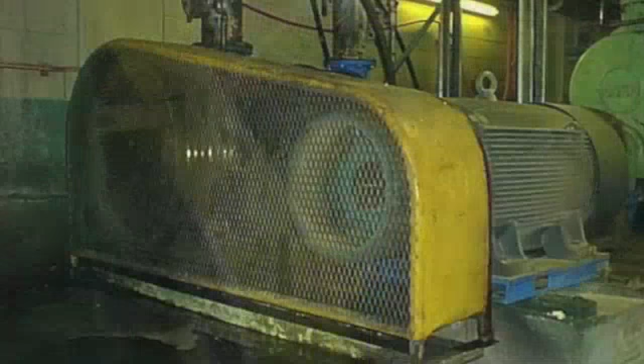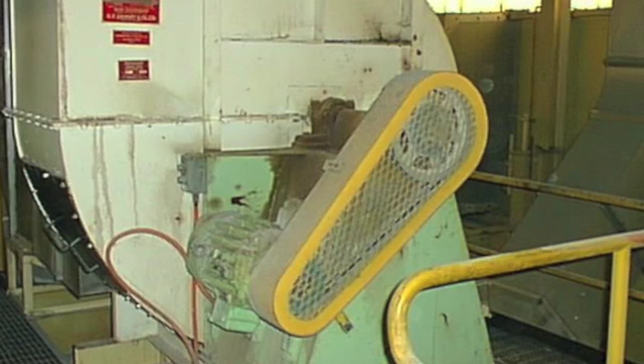Does that sound or look familiar to you? How reliable are your belt drives? Historically, we find it is often hard to justify improvements to belt-driven equipment. Squealing, slipping belts are often ignored until they completely fail, causing a significant production or even a safety loss. There's a variety of products out there to hide the problem, and they often only make the problem worse.

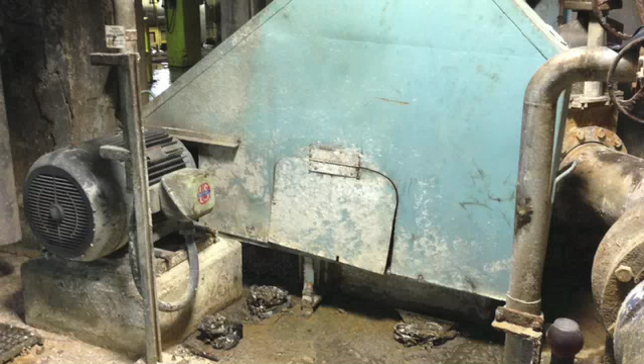When arguments are made to do something about the problem, the discussion often centers on the phrase, well, belts are cheap, we'll just change them when they break. So how do we justify applying reliable manufacturing techniques to belt-driven equipment? It's really not that hard.

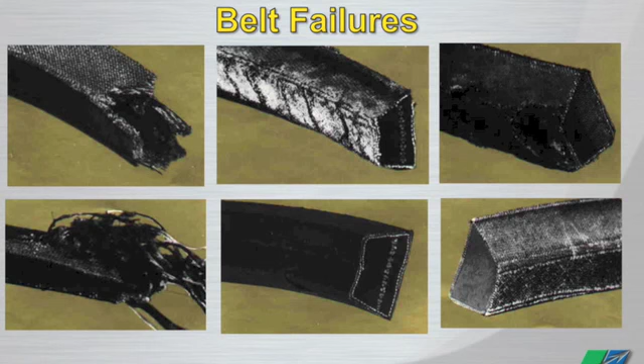We all know there are many causes of belt problems out there, including tension, pulley and sheave wear, overload, worn belts, contamination, overheating, all kinds of different problems. Nearly all of these end up causing the belts to slip. We know that properly adjusted V-belts slip between 2 and 5%. Anything more than 5% means energy is being wasted.

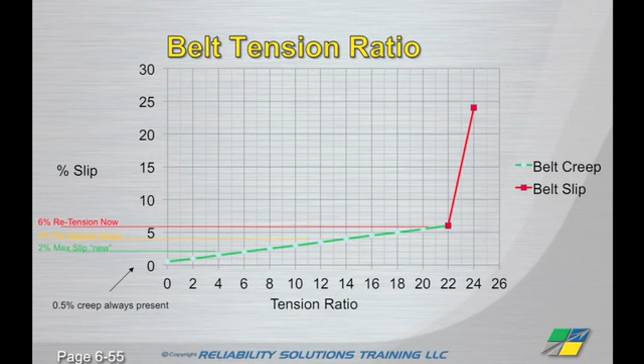We can use a strobe light or tachometer to measure the actual RPM of the driver and the actual RPM of the driven. And from that information, we can calculate how much slip is actually occurring. The slip is simply the difference between the theoretical RPM of the driven unit and the actual RPM of the driven unit, expressed as a percentage.

Before we can calculate the belt slip, we need to know the size of the pulleys on our machine. So I'm going to go ahead and measure the pulleys on this machine. When I measure these pulleys, I see that the smaller pulley is 4 inches in diameter, and the larger of the two pulleys on the driven unit is 6 inches in diameter. Now I have those measurements, I can do a couple of quick calculations on the board.

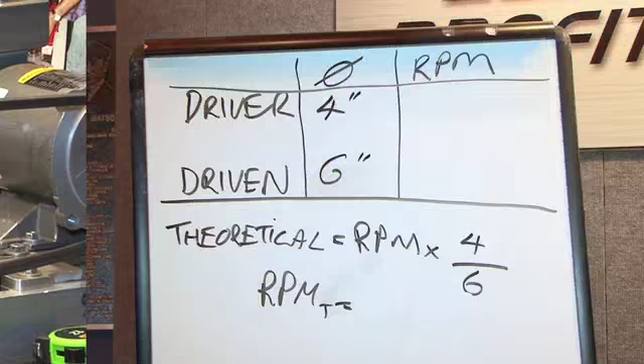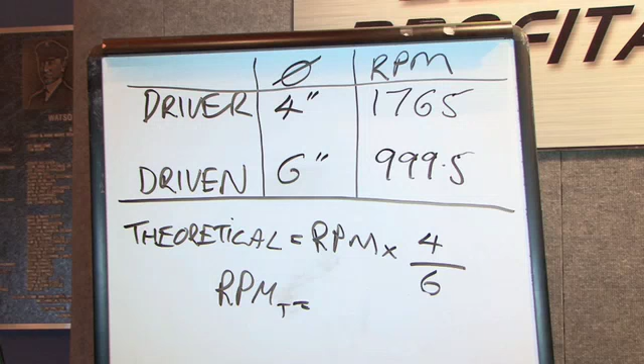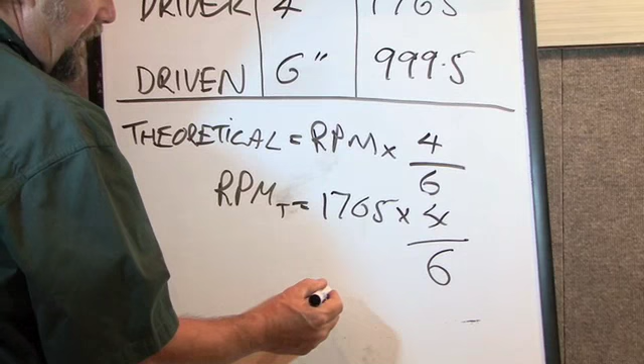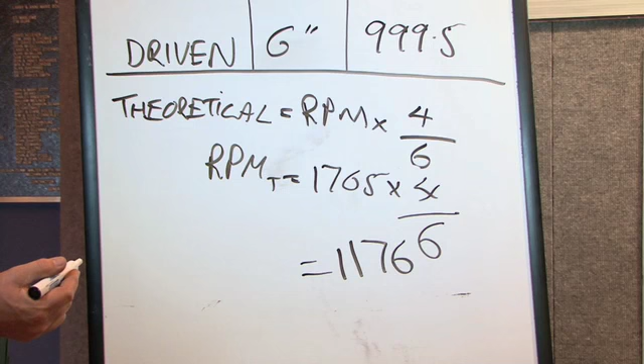So back at my whiteboard, we determined that the RPM of the driver was 1765. The actual RPM of the driven was 999.5. From that, the first thing I can do is calculate the theoretical RPM. So that's going to be 1765 multiplied by 4 divided by 6. And that equals 1176.

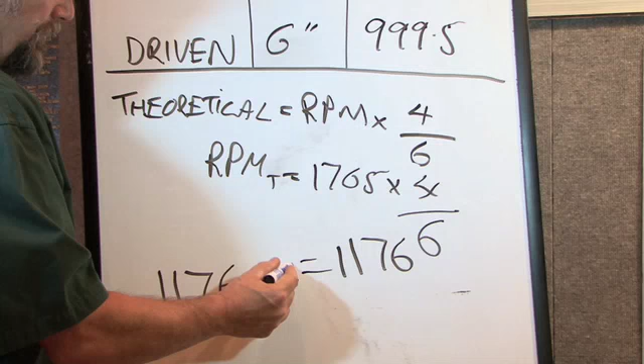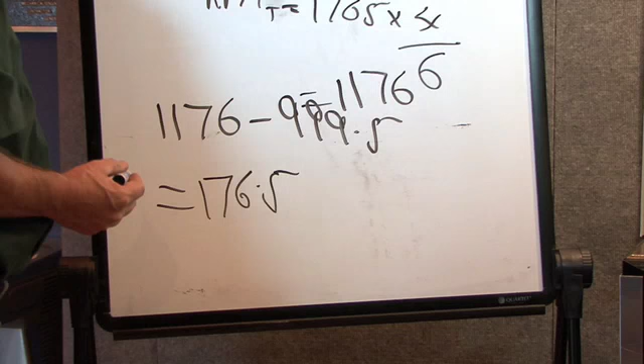So to calculate the amount of slip I have, what I need to do is take the theoretical RPM, which is 1176. I need to subtract the actual RPM, which was 999.5. And that equals 176.5. What I then do is divide that by the theoretical speed, 1176, and that will come to 15%.

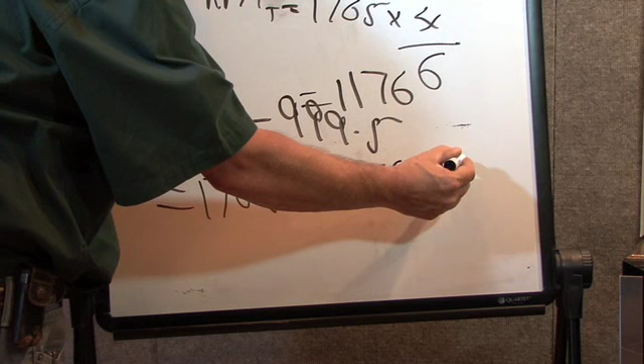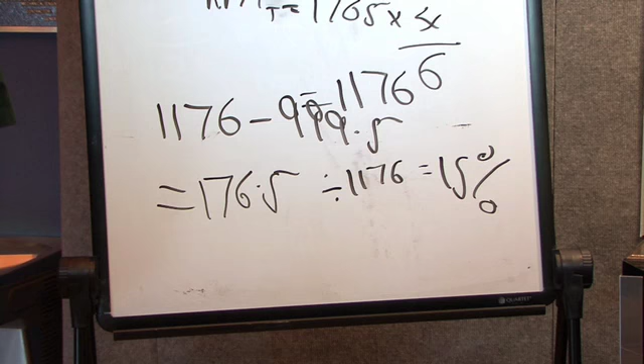And 15% slip is, of course, a lot more slip than we would expect on a motor, indicating that the tension needs to be adjusted. Now, if we have a motor putting out 100 horsepower and we have 15% slip on the drive, how many horsepower are we losing? Yes, you guessed it, 15.

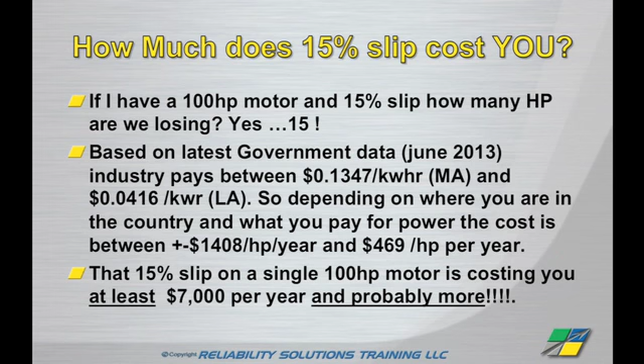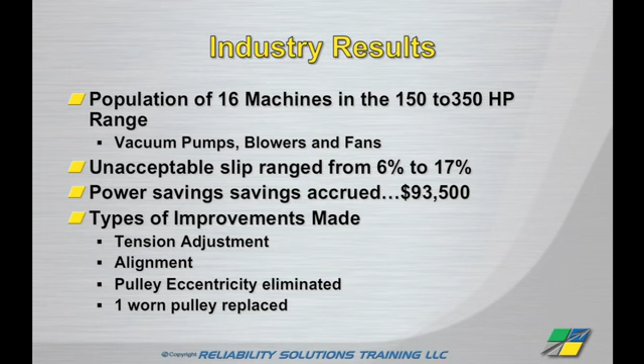We have clients that have documented tens and hundreds of thousands of dollars in savings due to slip. Here are a couple of examples on the screen right now. So there you have it. Eliminating belt slip can literally add tens or hundreds of thousands of dollars to your bottom line. When are you going to start?